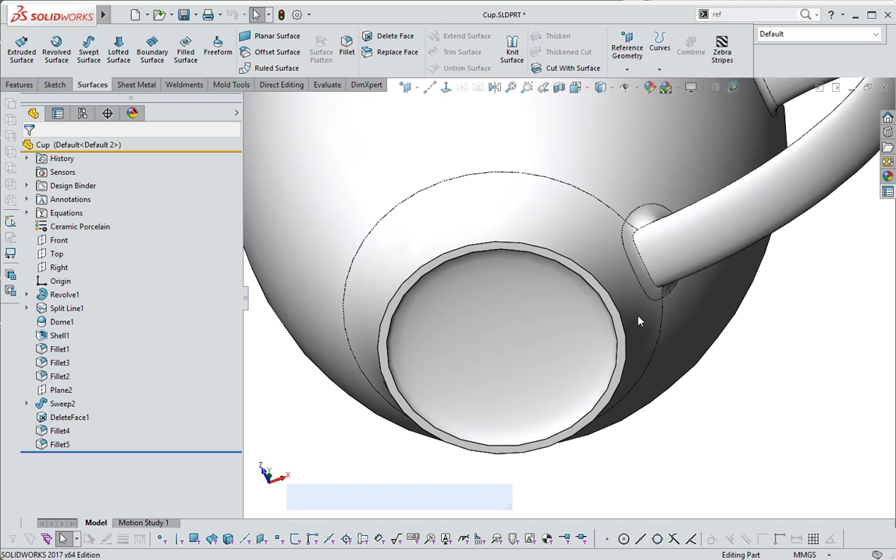So this is what we're looking for. It's going to have smooth surfaces everywhere other than on the bottom, where you have these two sharp edges. So everything else must be smooth. I'm going to show you two different ways, and this is the first way using the shelling method.

So let's go across to the demo to start things off. Alright, so here's my sketch. I'm not going to redraw this since you already know how to draw sketches, but I'll help you on this point: if you want to dimension across something, you need a center line. If you don't have a center line in place, you can't do that. So my center line is vertical.

If I activate the Smart Dimension command and click the center line, I can move my mouse to the right or left, inside or outside, and I'll either get a radius or, in this case, a diameter, which is what I want.

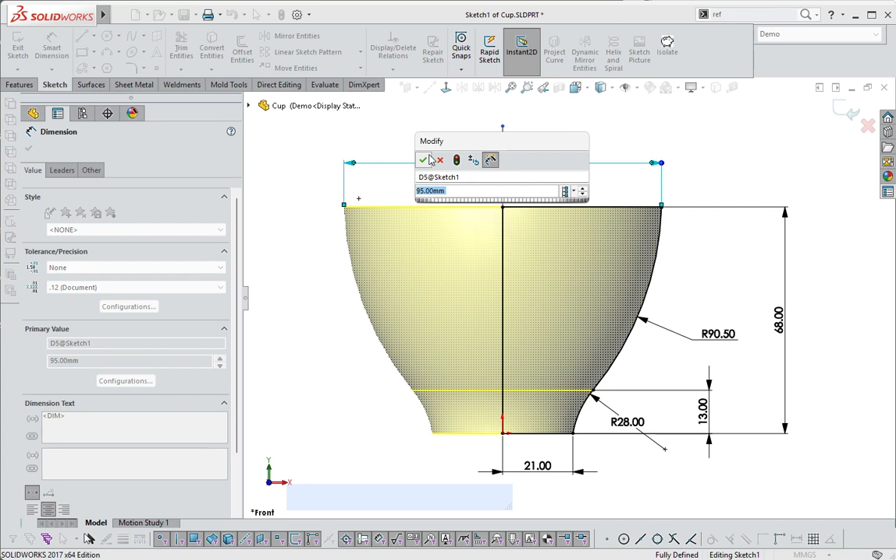Okay, and then these are all fully defined so that I can control things. So there we go: that's a size dimension, a size dimension, a size and position dimension, that's a position dimension, and that's a size and position dimension.

Okay, let's exit. Alright, so I'll have to delete this, because actually that's what I want. So this is what you'll have: you'll have a sketch.

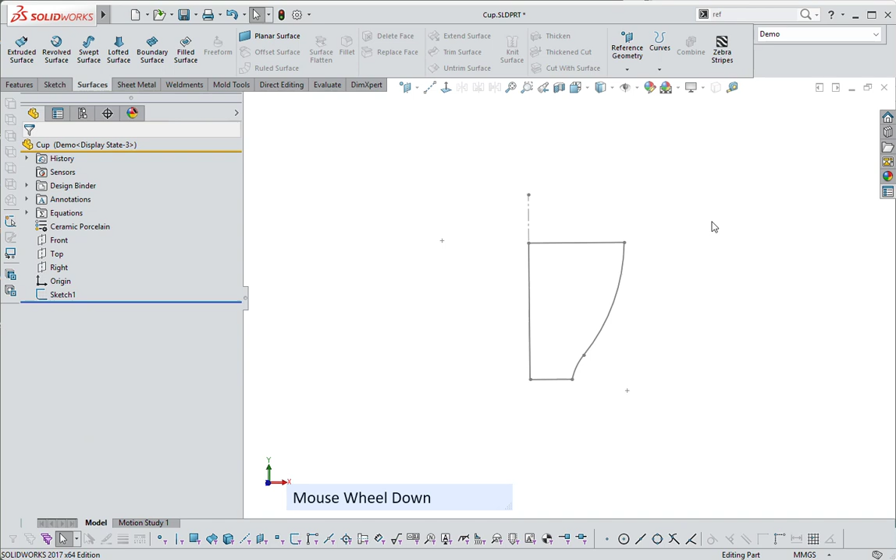If you go across to Features and go to Revolve Boss, you can then select the sketch. SolidWorks will usually, if there's a center line in place, figure out what you want. You can select other lines if you wish, but obviously that's not going to be clever to do anything other than what I've done here.

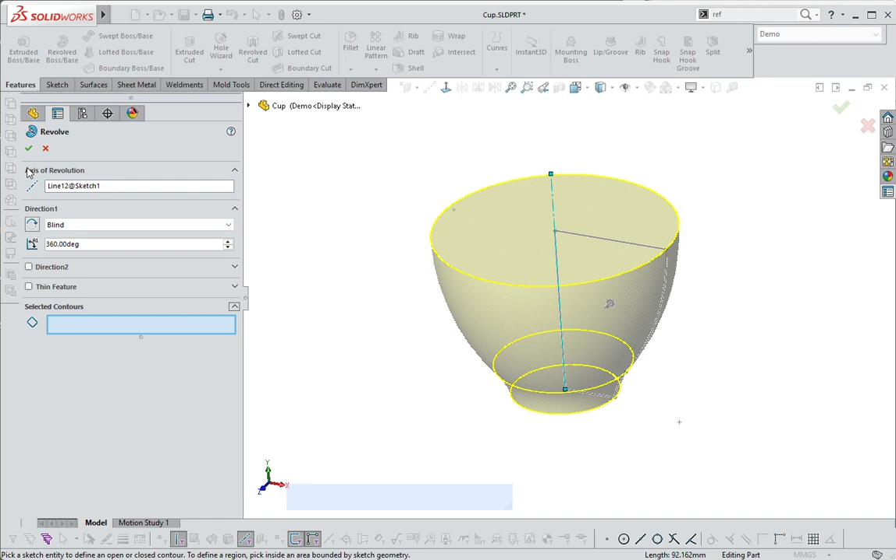Once again, you have selected contours, so if you've got more than one contour, you can handle it there — in this case, you shouldn't have. Okay, so there's my basic cup. I'm now going to shell it.

So there's the shell command. If you can't find something I haven't shown you before, there's this command at the top where you can type in what you're looking for, and SolidWorks will show you using this eye where it is. I didn't do that — SolidWorks just showed me where it is.

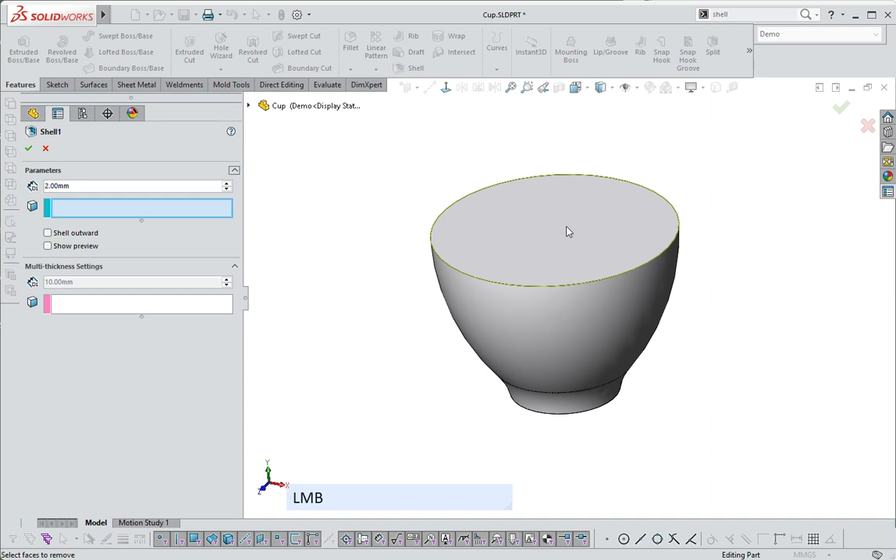I'm going to make this about 2 millimeters thick, because that's about right, then select that face and say okay. Alright, so there's my basic cup. I'm actually doing things the wrong way around, but I'm going to show you how to fix them.

So I'm going to put a dish in the bottom of this. I'll select Sketch while I've selected that face, not Edit Sketch — make sure it's Sketch. Then in your head-up display there's Convert Entities, or you can go to Sketch, Convert Entities, or right-click, drag, and offset.

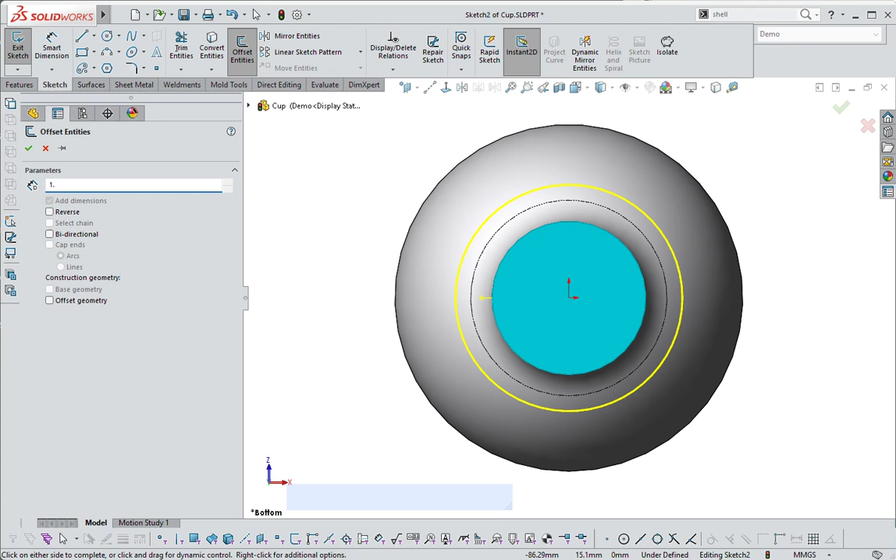Actually, we don't want to convert, we want to offset, so make sure it's offset. I want to make this about 1.8, and then if I pull my mouse inside or outside, I can tell it which side I want that line to go. So there we go — that's a derived sketch from Convert Entities, but it's the Offset command you want to use, which I can get to by right-clicking.

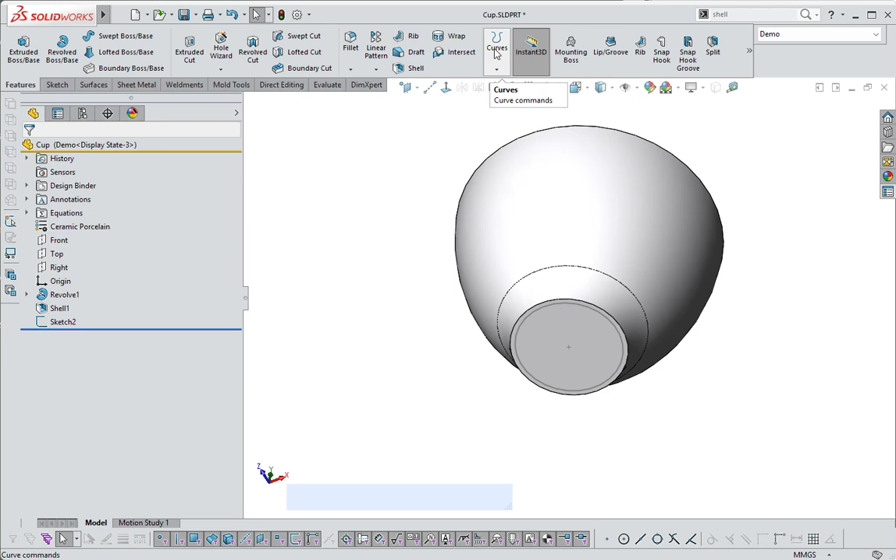Right, exit that. As long as I've got a sketch on a plane, I can go to this command here, Curves, and say Split Line. Then I select the sketch and the face, not the plane — make sure this is on Projection, not any of the others. Say okay, and now I have two different faces.

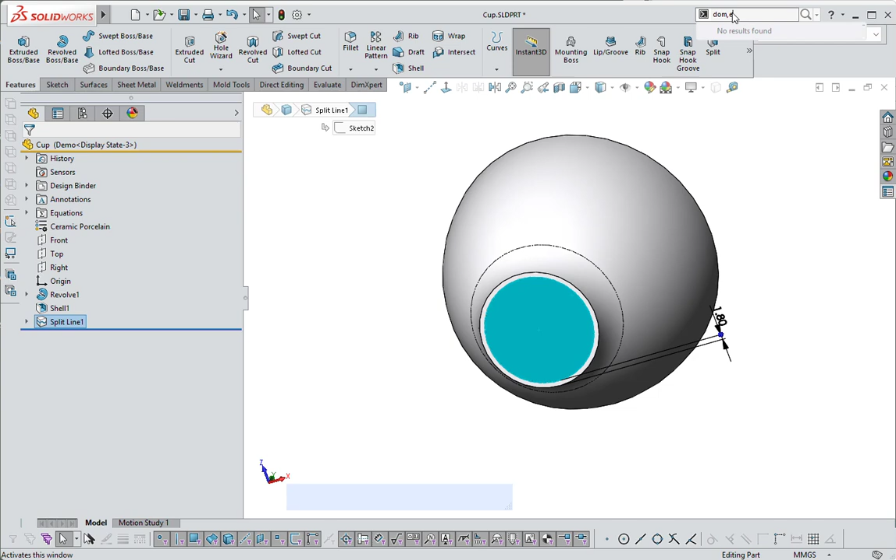Look at that, 1, 2. Okay, which means I can use this interface to do something called a Dome. Now, I don't know where that is, so I'm just going to type Dome in the top here, and if I click on the command, it'll activate it.

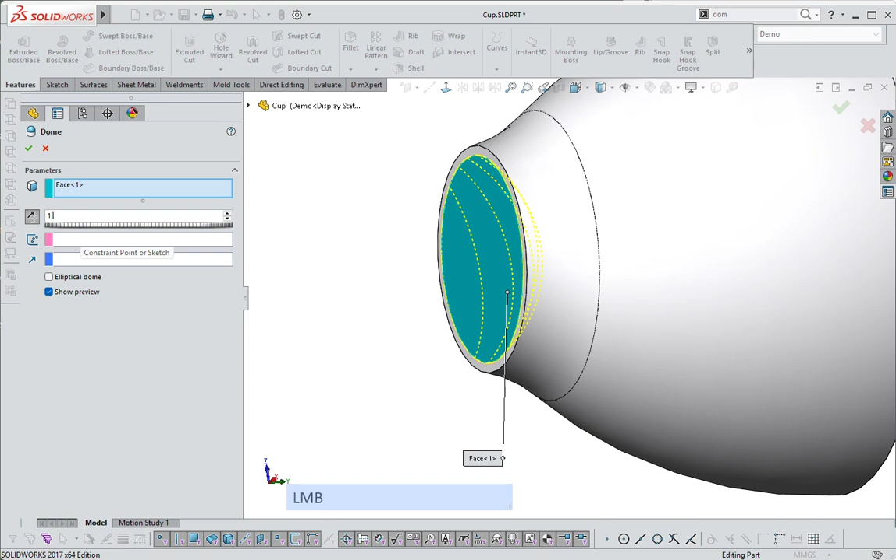You'll see that the dome likes to come out, but I want it to go inwards. If I make it go inwards, though, it's going to be limited. So if I try 10 millimeters, which is absurd — I don't want you to do that — but fortunately you're not going to be able to, since this is going to be limited to about 1.8, depending on your geometry, maybe 1.7 or 1.8.

Let's see if 1.8 will do it. 1.8 — I got away with that. Okay, so that's cool. Now I'm going to put a fillet on the bottom here, and let's make this about 5.

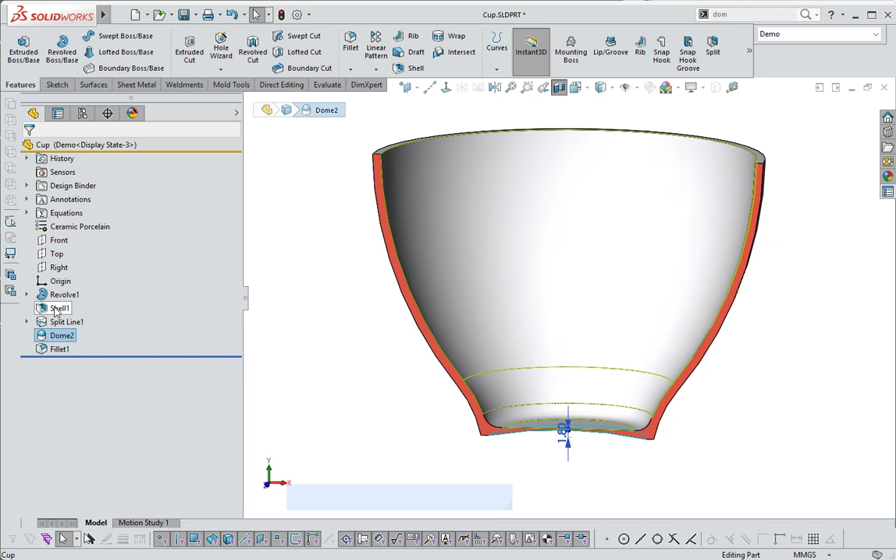Okay, now look at this — got an error here. Can you see how thin that face, that little bit, is there? That's because I put the shell command in before I did the dome, or the dishing, and I want them to go in the opposite direction. So what I can do is click on this item, drag it to beneath Dome, and watch what happens.

It just updates everything. The fillet command you might have to redo. So if there's an angry red thing there saying it doesn't know what you want anymore, it's because that edge is missing, and it's going to say missing edge.

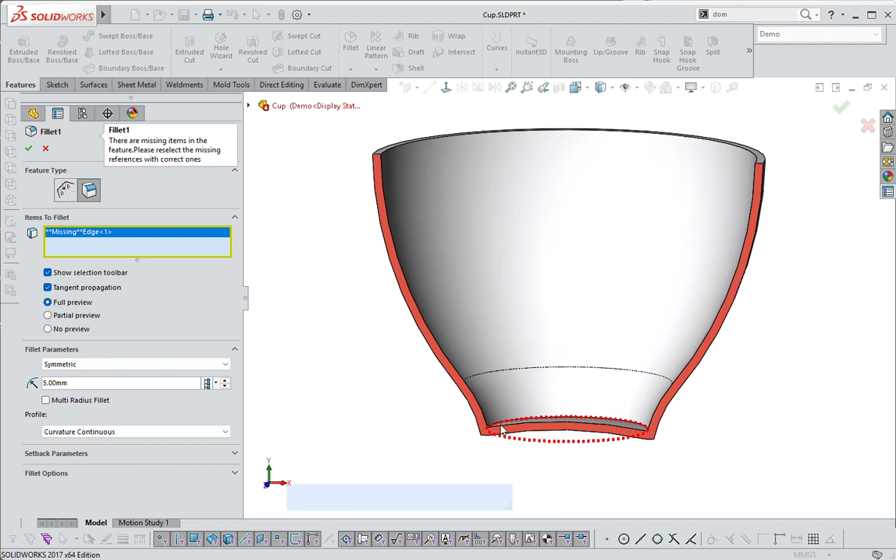Just reselect the edge and make it 5. That's way too small, and I think it's because I selected the wrong edge. So you've got to watch out here. Can you see there are actually 2 edges in place? I'm going to delete that one, and it's this bottom one. That one's wrong as well.

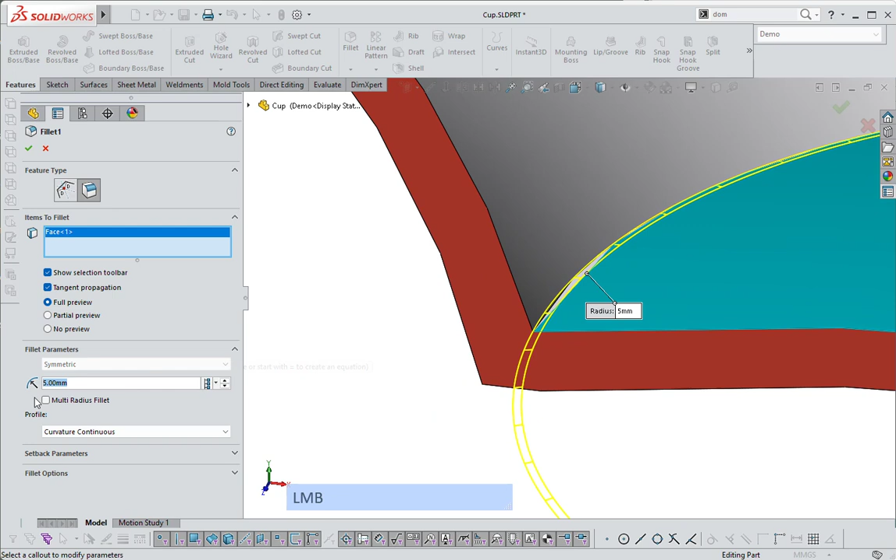Okay, let's just try if we increase this. I don't think this is going to help. No. All right, so if you've got this problem, then we're going to have to delete that one, and you're going to show the fillet command again.

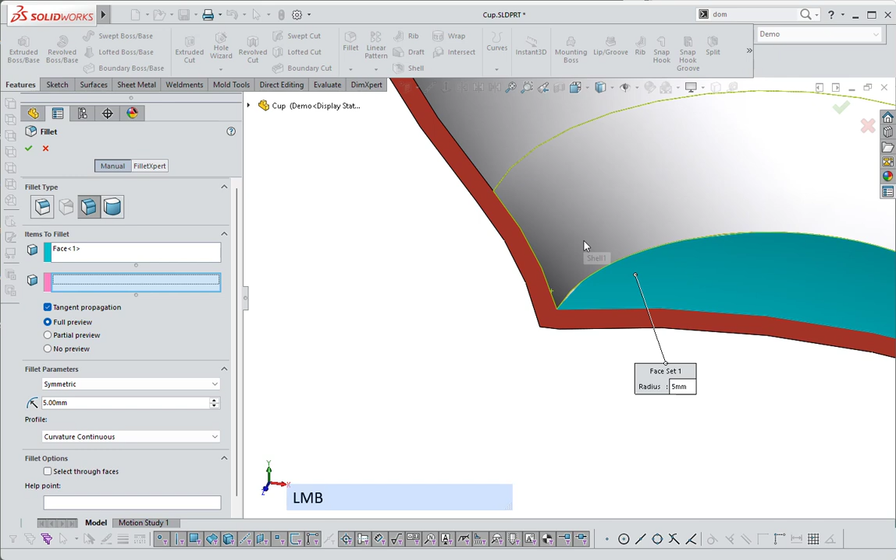So let's activate it from here, fillet. In this case, we're going to use these 2 faces, so face fillet, and let's make that 5 again. What you have to do here is select one face, move your mouse over. It's the only way you can do it, there's no shortcut. Move to the next face and select that one, and that'll put one in according to your desires.

Okay, there we go. So that's the basics. Now I want to thin this edge out, so I'm going to put another fillet in here and show you another trick.

Thus far, you have done fillets which are constant fillet size, and at the bottom I haven't shown you this one, you've chosen symmetric. Well, you haven't chosen it, it defaults to it. If you select asymmetric, you'll get 2 dimensions. 5 and 5 is not what we want. We want about 7 and about 1.2.

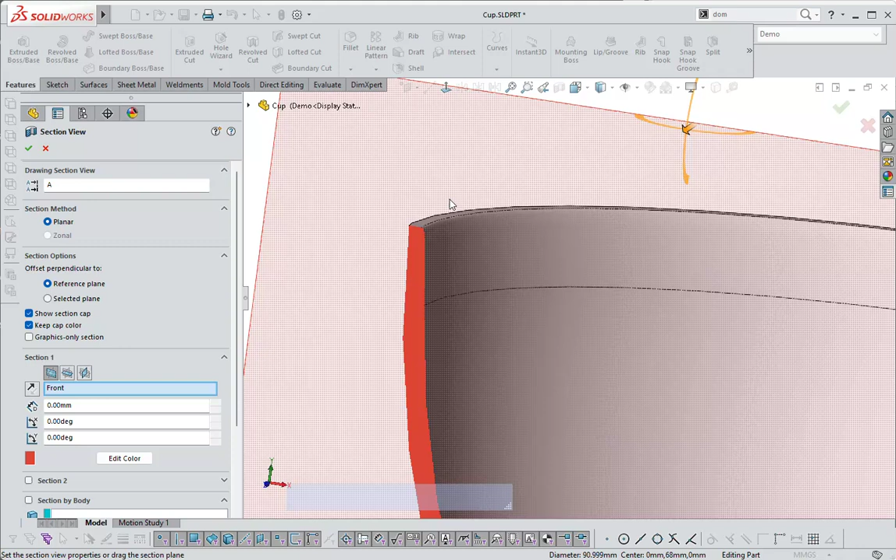If you put them in the opposite direction, let's say I'd made 7 and 1.2, just reverse direction using this button, and that should show you what you're going to get. Let's just see what that's done. I think you can see there, I've actually thinned out that edge.

And then I'm going to just add one more edge in here. Fillet - watch out here, it's going to default back to whatever your last command was, so symmetric. And this is going to have to be pretty small, 0.5 or 0.6. Otherwise, physically, it's impossible. Right, so that's the body of our cup.

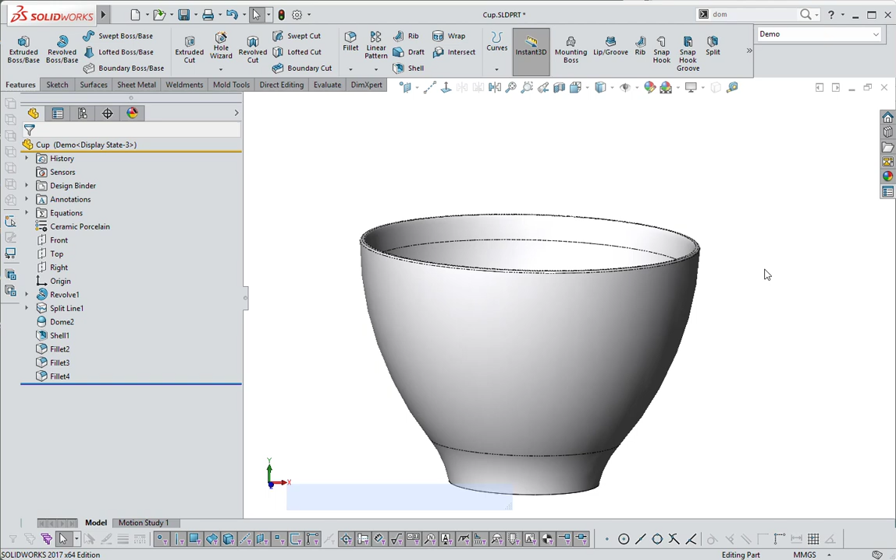Let's put the handle in. So we're going to go back to front view because that's the view that you would view this from normally. That's the front view. Okay, so there's my sketch environment.

Remember I showed you in class how to use the spline tool, but we're not going to use the spline tool because it's a nasty thing to control. Trying to get these to behave is a trick all on its own.

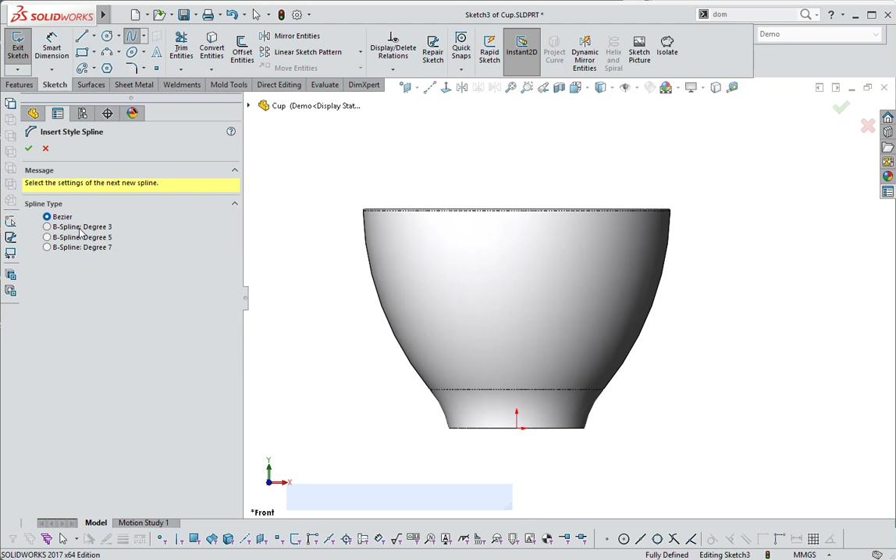Make sure you select the style spline and then the bezier. Don't choose any of the B splines for now, it doesn't really matter, but these are just going to complicate things. Now make sure that your spline comes inside the cup, not outside. And it can actually touch this line.

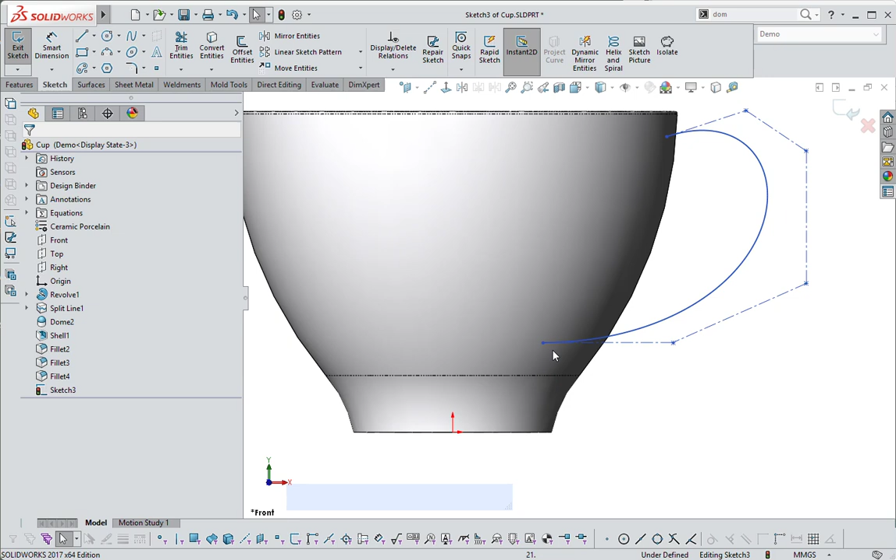Let's try that. Please make sure that you select as few of these as possible. I might even be able to get away with - no, we're going to need one more because I want to do something here. So there's 4, and then I'm going to make that line there horizontal and just pull this down, and let's get it to connect to that one there.

All right. Okay, and so here, I don't want that connected. I want to be able to move it around. That still isn't. Something like that. Okay, here's the one legitimate use of this command, which the third year showed you, Fully Define Sketch.

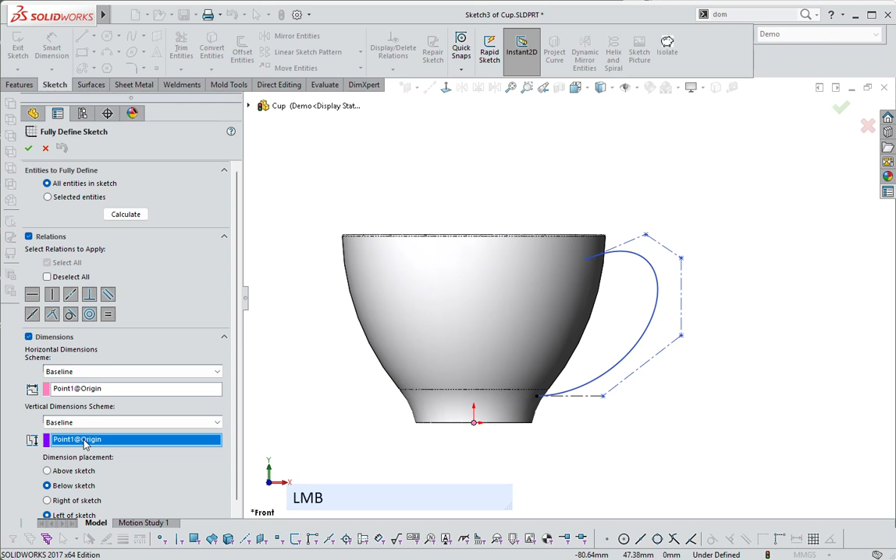Well, there are a few, but this is the one I'm allowing you to use for now. Make sure that all entities in sketch is selected, all the relations, and then the point should default to the origin - that's the origin X and the origin Y. Okay, say okay, and then it'll put all these dimensions in.

So you've got a bit of work to do here if you want me to be happy and for you to get marks, because you need to round these off. And if you don't, I'm not going to be happy.

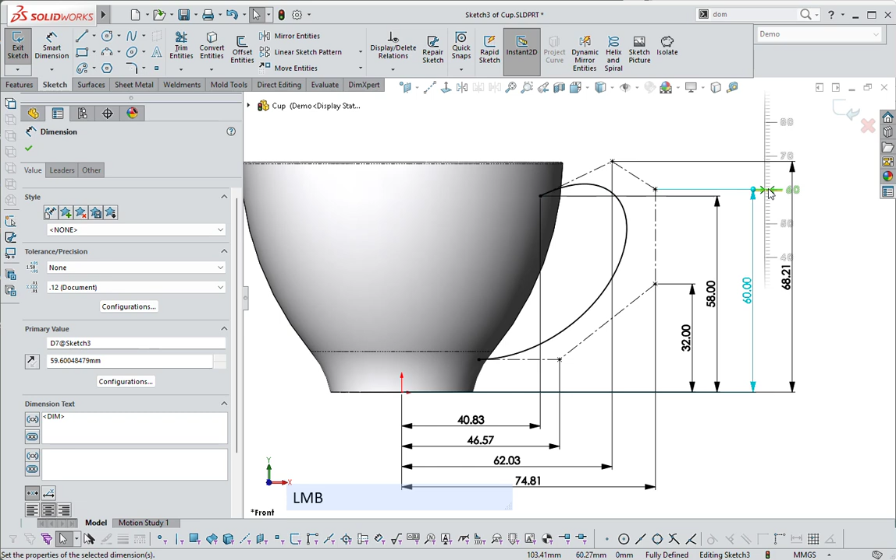All right, so that's 32. One way is to click on it and type the dimension in. The other way is to click on the end and just drag this down and get it to snap to what you want. I like this method because it's much quicker, as you can see, but you've got to get that snapping right.

So the way to do it is make sure that your cursor is on this ruler. Above the ruler you'll be able to move infinite degrees. The moment you get to the ruler, it'll snap to some sort of dimension.

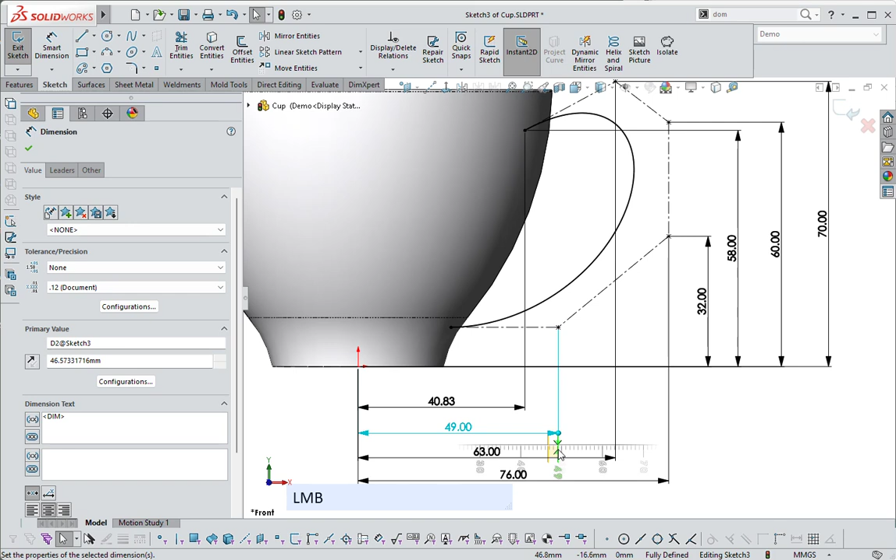I'm not going to spend too much time on this. You can refine it as long as these are all rounded — to 0.2 or 0.25 or 0.5 or something like that, but not 0.19 or 0.818 or some ridiculous figure.

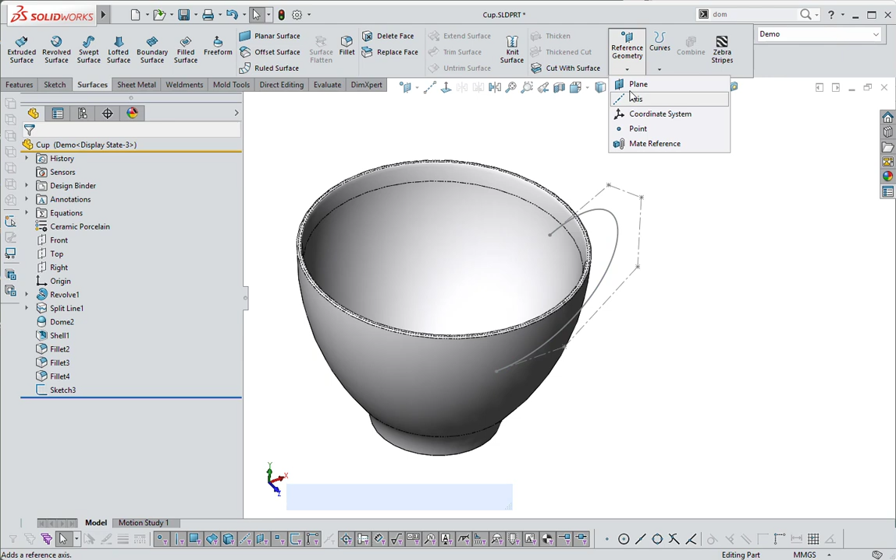The next one is how to put a plane in on the end of the sketch. You can either select the sketch first and then go to the command, or select the command first — it's under Surfaces, Reference Geometry, Plane, or under your head-up display if you've got my settings selected.

Select the sketch, the line first, and then select the end of the line. You'll see it go from line — that's the line — to next point is the end of the line. Say okay, and now it's normal, perpendicular to that line.

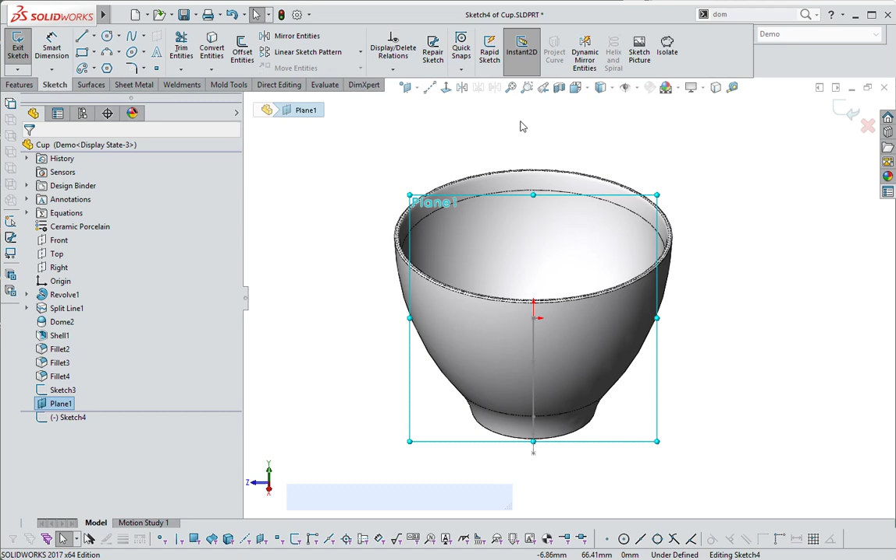If I select the plane and put a sketch on it, this is what it'll do. Now you need to be careful here, because I'm going to pick the ellipse tool. You'll see the snaps are on, so if I drag from the origin, it's going to want to snap to something.

We don't want it to snap to something because it's going to mess the drawing up. So hold the control button down and the snaps will disappear. Okay, let's just drag it up to that point, click and drag it up.

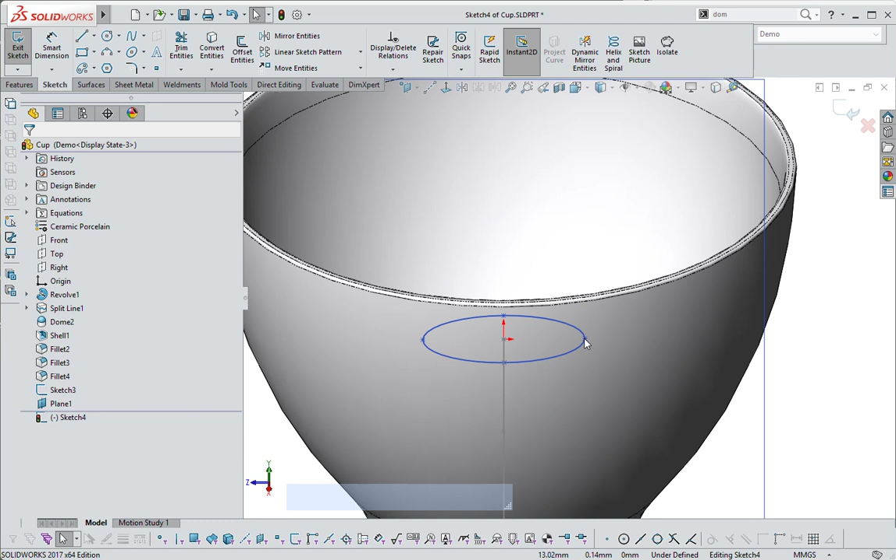The first thing we want to do here is make these two horizontal.

Then we want to connect — I'd like to connect that center point. So select the center point, then select this line by holding the shift button down, and say make pierce.

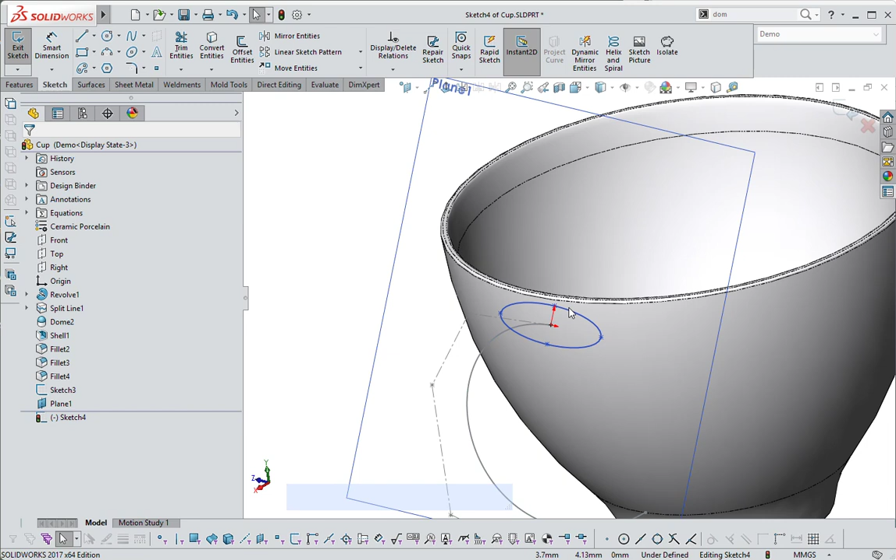If you've done this correctly, it shouldn't give you a problem. If you've snapped this drawing in any way to any line, you're going to have a big mess, I promise you. So just pay attention to what I've done here.

I'm going to go back to normal view, just so it's easy to show you what I'm doing. So I'm just giving this a width and a height.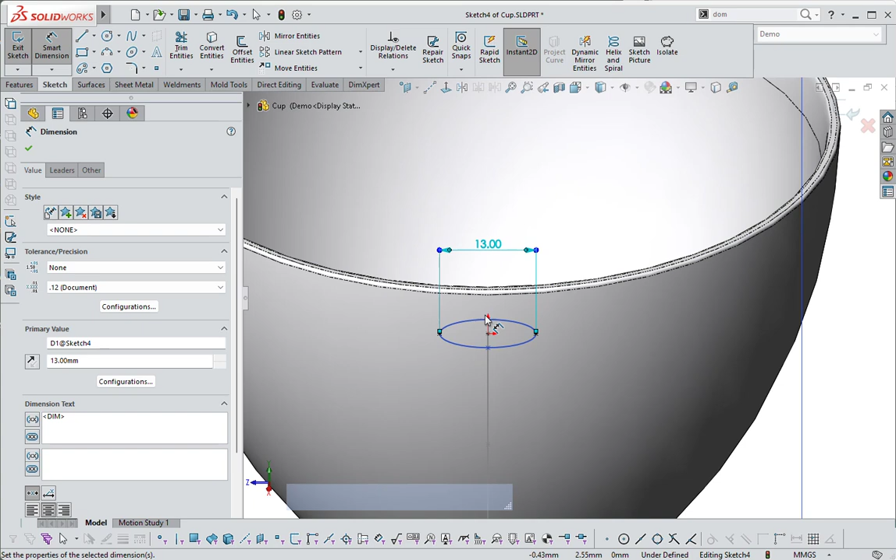26 is way too big, let's make it about 13 — see, it's scaled proportionately — and let's make this about 4. Okay, that's about right. If I exit that, it's a fully defined sketch. Let's hide this.

The command you're going to use now is the Revolve Boss, which is also, if I right-click drag, over here, or if I just right-click, over here. It's going to want to know — Revolve.

Oh, it's not Revolve, sorry, I beg your pardon — it is Swept. So it's not that one, it's this one here, Swept Boss.

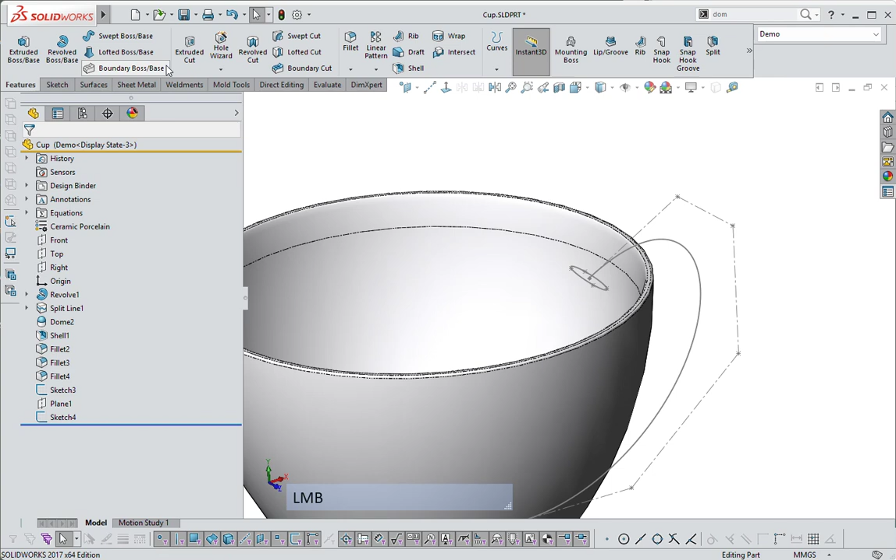Okay, please don't blame me for making a mistake. It's this one here. So you want the closed sketch first and then the open sketch. Boom. Alright, so depending on how you've done this sketch, you might be able to get away with — let's just see if this works — align with end faces. You can see it's actually deleted that one there.

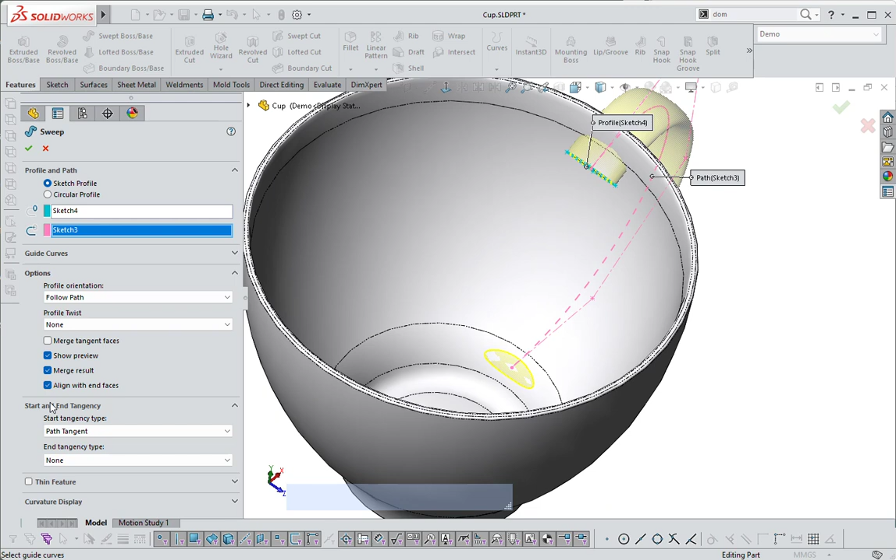So let me just show you align — it depends on how far the sketch is in.

I've gotten rid of the bottom one, but I want to get rid of these two. So I'm going to go across to Surfaces, Delete Face, and make sure it's set to Delete and Patch, not one of the others.

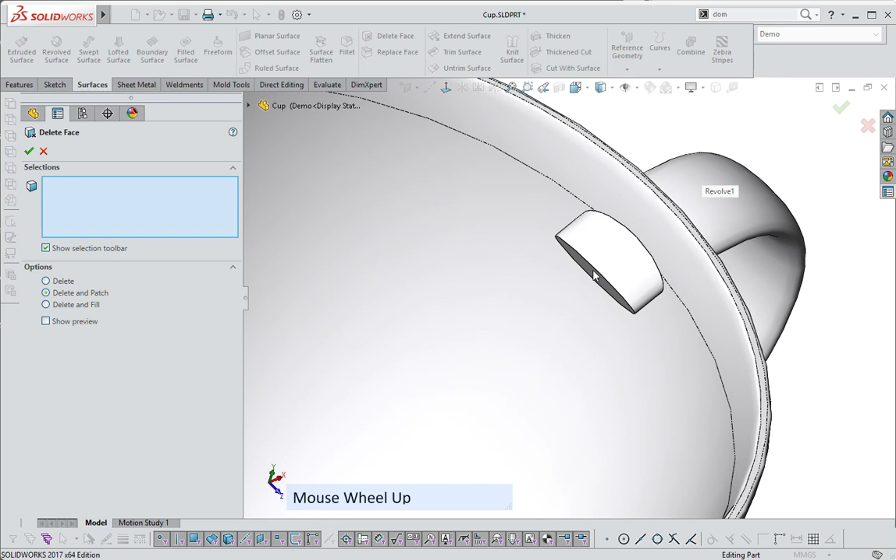We'll show you how to use those later. Make sure you select all of the faces you want — if you don't, you'll get this rebuild error message. So just select the other face, say yes, and magically that disappears.

Okay, so we're almost done. Last thing is to put some fillets in over here. So fillet — it's symmetric. I could show you another way, but actually this is on curvature continuous.

It would normally be under circular, so probably the quickest way to make something a bit smoother is to make it curvature continuous.

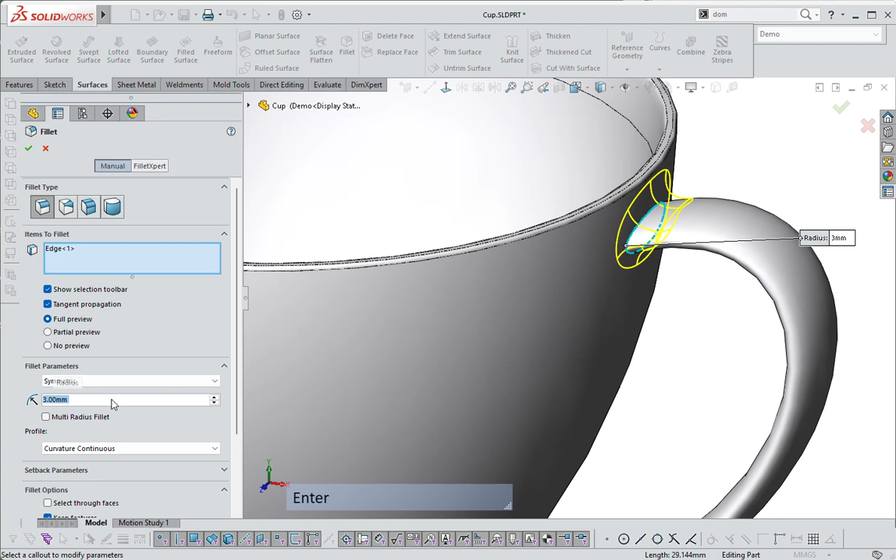I'll explain what that is to you a lot later. 3 is too big, 2 looks about right, and we can select them both if we want. I'm not going to be too fussy — that's not really ideal, but it's good enough for you to know how to use this.

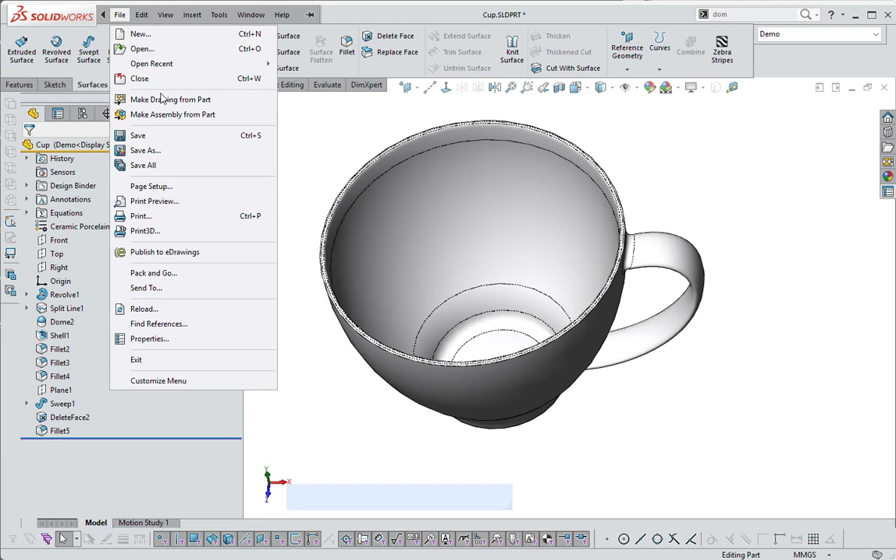And there we go. Please make sure you save this — File, Save As.

It should be your full first name, space dash space, and it is Crockery, space dash space, and it is Cup, space dash space, and then R1. And then that's it.